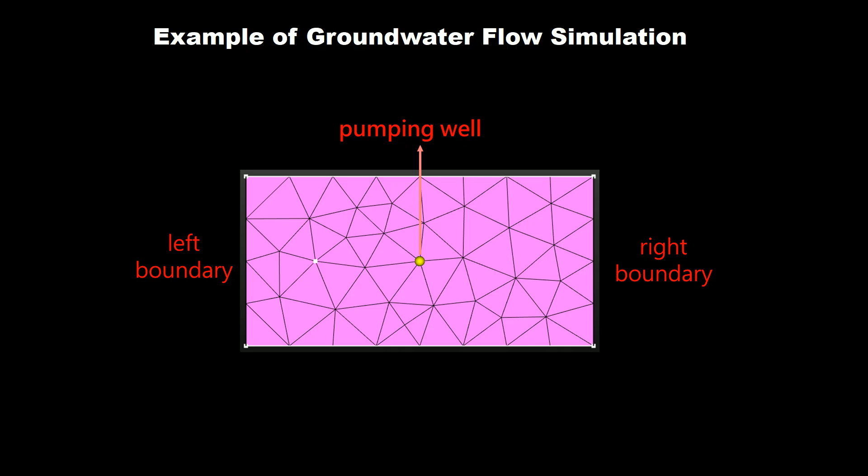This video demonstrates the simulation of three-dimensional water flow, featuring 2 measured water levels and 1 pumping well. Groundwater is continuously extracted at a constant rate from the center of the region. The simulation aims to assess how the groundwater level changes over time.

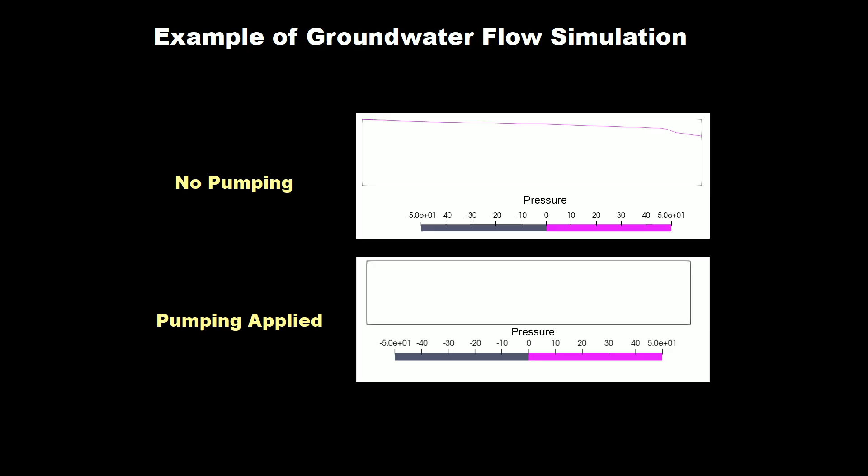The results will illustrate how the water flow, including its velocity and direction, changes throughout the simulation period. The simulation consists of 6 main steps. First, in a new project, we use the Geometry Mesh GUI to build the geometric model and generate the mesh, as well as to define the spatial locations of initial and boundary conditions.

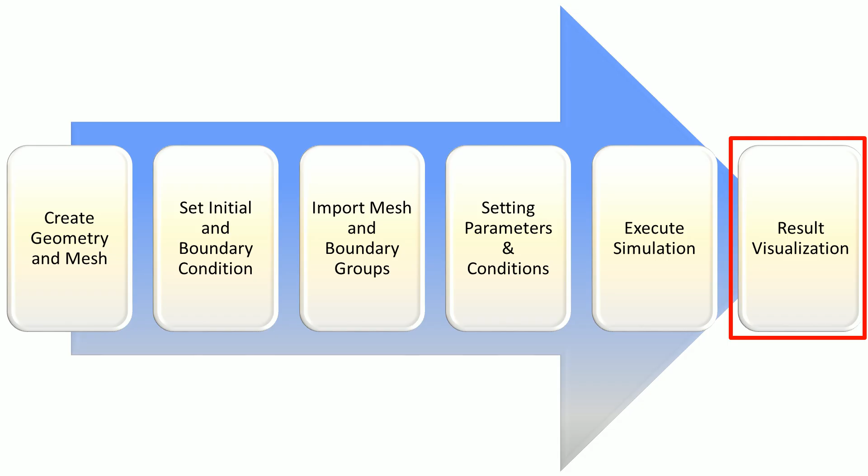Next, in the Model Parameter Input and Simulation GUI, we import the mesh and spatial group information, configure the initial or boundary conditions with specific parameter values, and then run the simulation process. Finally, the simulation result file needs to be decoded and converted to the desired format, and it can then be visualized using the Visualization GUI.

We need a central project in the THMC platform to cascade and manage all related data. To begin, create a new project by entering a desired project name and selecting THMC 3D, then click Confirm. Next, open Geometry Mesh GUI. Click File and create a new solution. A single project supports multiple solutions. However, in this case, we use the default solution name. Click Create New to complete the process.

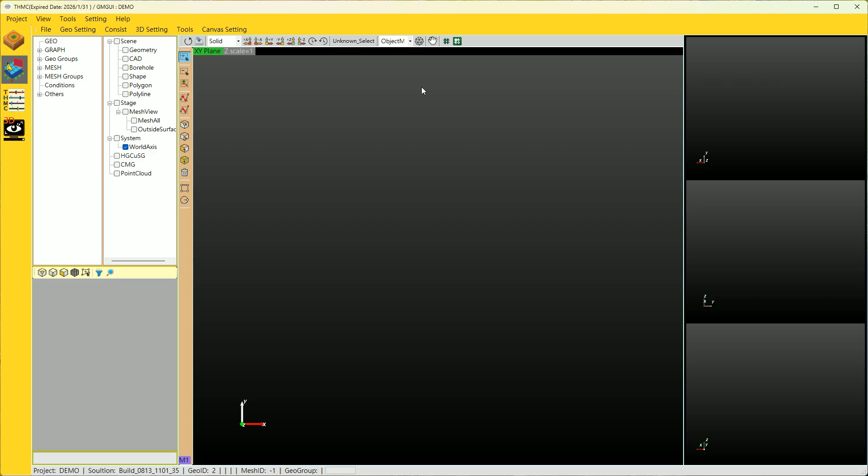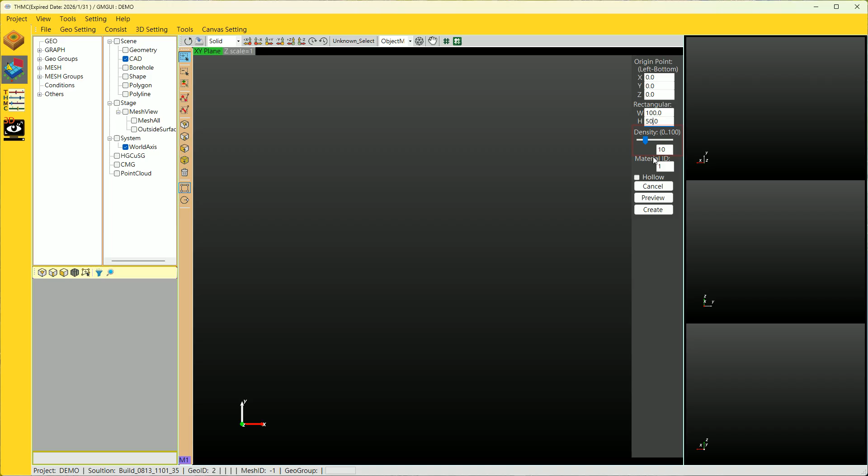To build the geometry mesh, start by creating a rectangular or a circular polygon, depending on your modeling needs. Enter the dimensions according to your site parameters. In this example, the site is 100 meters in width and 50 meters in height. At this stage, you can also adjust the mesh density. The smaller the value, the higher the mesh resolution. Once the parameters are set, click Preview then Create. If you're modeling a tunnel or hollow structure, create an additional polygon and check the hollow option.

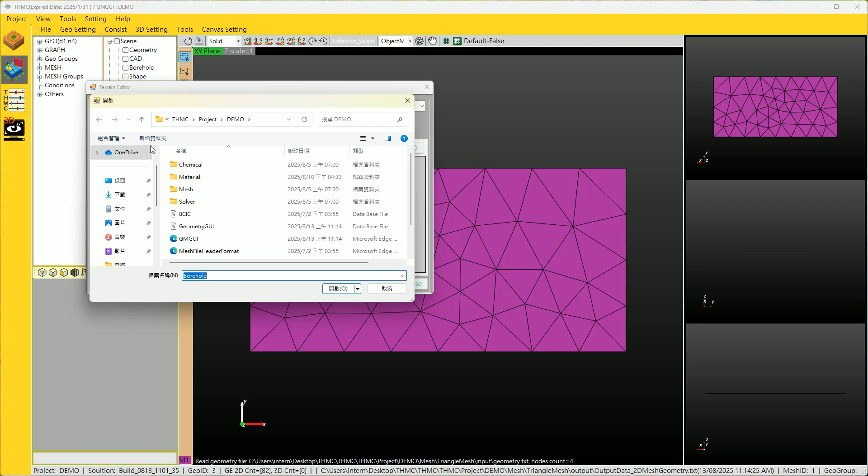Next, click the Mesh Generator icon. In this step, we create a two-dimensional mesh. The mesh type is set to triangle. The next step is processing the borehole data. Click 3D Setting, then open Terrain Editor. Click Import Borehole and select the file that contains coordinate data. You can adjust the borehole marker size under Canvas Settings to improve visibility.

To update the mesh, click the Mesh Generator icon and click Triangle again. This action will regenerate the corresponding mesh nodes to align with the borehole locations. The next step is to define the depth of the geological layers. Click 3D Setting to open Depth Editor, and you can see 3 panels in the window. Start with the first panel, insert your number of geometry layers, and the number of materials. Set the stretch according to your site.

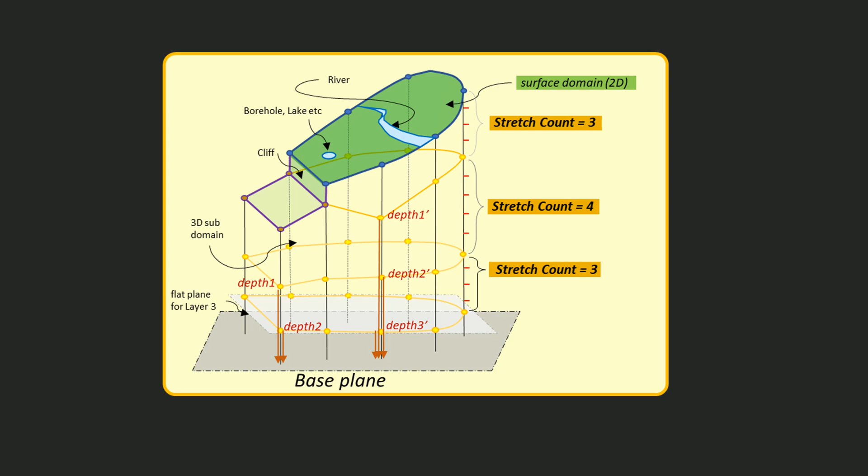The stretch count refers to the number of horizontal slices at this geometry layer, which helps generate mesh elements with finer resolution in the vertical direction. In this case, we set the stretch count as 3, 4, and 3. This means the top geometry layer is divided into 3 mesh layers, the middle geometry layer into 4 mesh layers, and the bottom geometry layer into 3 mesh layers. Moving on to the second panel, set the geometry layer for each overland surface domain.

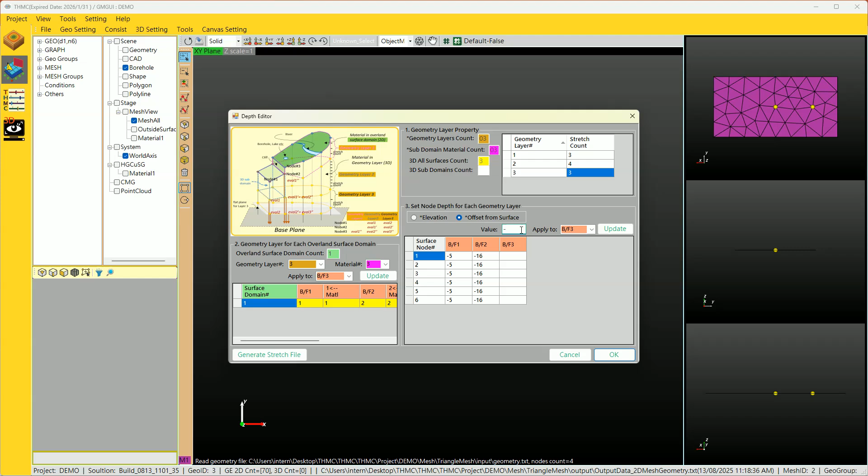Now we set the node depth in the third panel. You can select elevation or offset from surface, depending on your data. Then, input the depth values for each node across the different geometry layers. To quickly apply a value to the entire column, select the target layer, enter the desired depth, and click Update. You can also edit individual nodes to match specific terrain features.

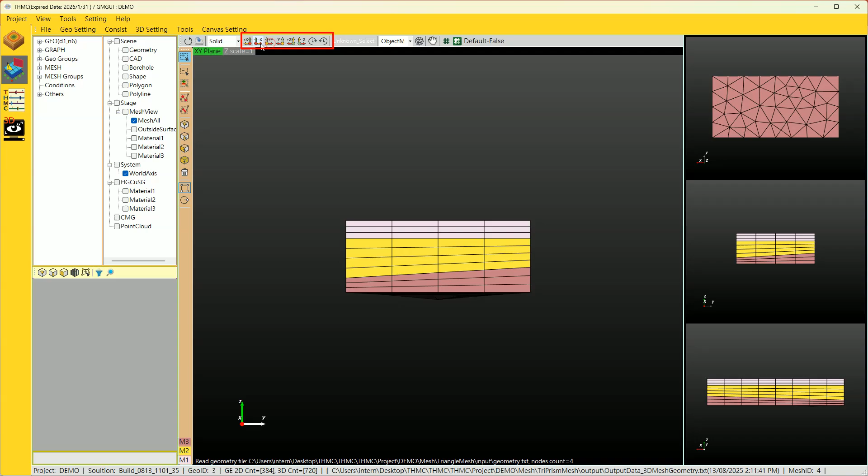Click the Mesh Generator icon, then select Triangle Prism to generate a three-dimensional mesh. Left-click to rotate the view, right-click to zoom in and out, and click the scroll wheel to pan. You can set the view direction from the panel above. Now the mesh is complete. The next step is to set spatial location groups for initial and boundary conditions. First, set boundary nodes into groups.

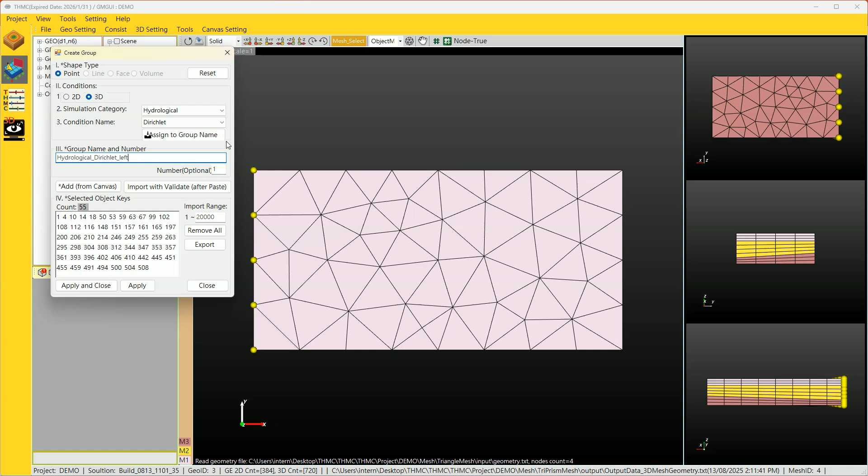Click Select Nodes and select the left boundary. You can see the number of nodes on the left. There are 55 nodes for the left boundary in this demonstration. Click Create Group. Select Hydrological as the simulation category and choose Dirichlet as the condition type for the constant head boundary. Click Assign Group Name and edit the group name to something recognizable. Make sure the point count is correct and click Apply and Close. The group can now be found under Conditions. Click the Delete All Selected icon and repeat the steps for the right boundary.

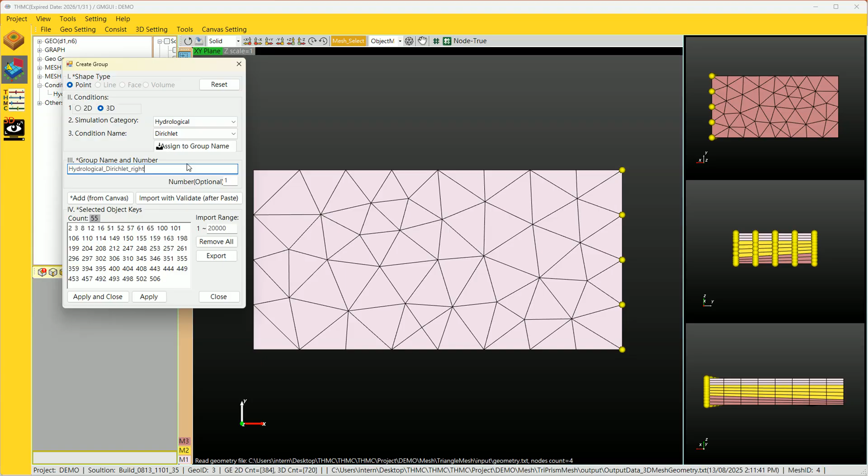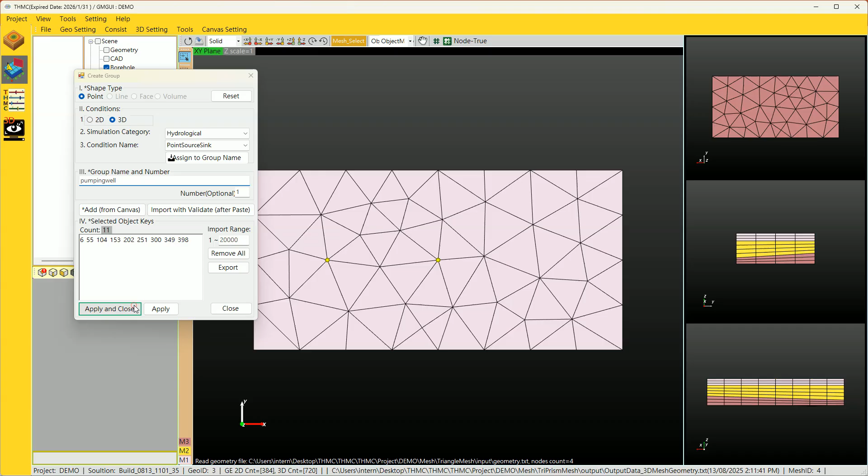Next, select the pumping well. Please note that the condition name is point source sink. Lastly, select all nodes. This is for setting the initial water level. The condition name should be initial.

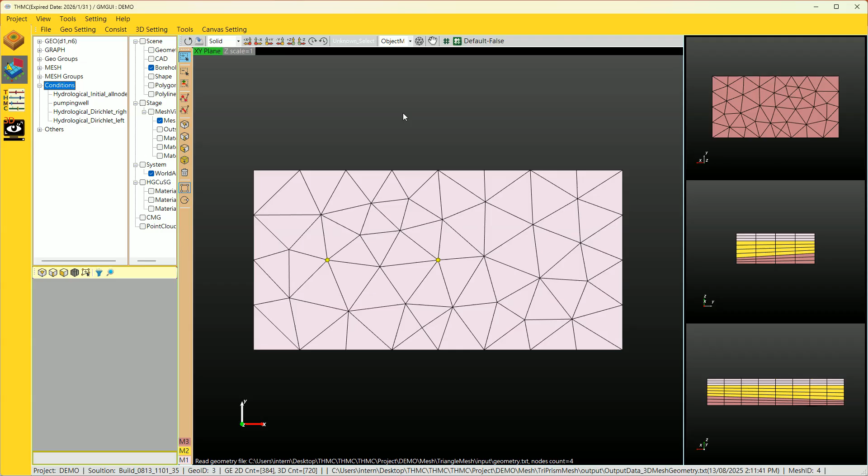You can recheck the spatial group setting results. There should be 4 groups under conditions after all the steps are done. Finally, save all setting results in the menu by clicking File, then Save Solution, and click OK. The process in this module is complete. Open Model Parameter Input and Simulation GUI. On the top left, click the Mesh Import and Boundary Data icon and click Import.

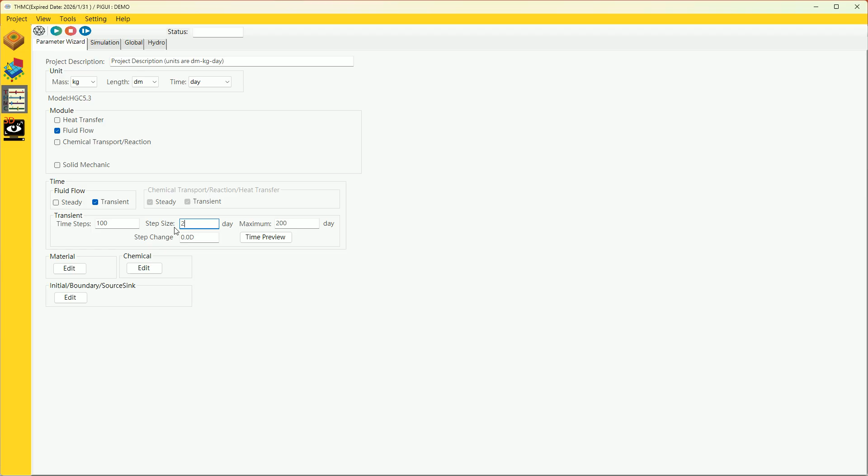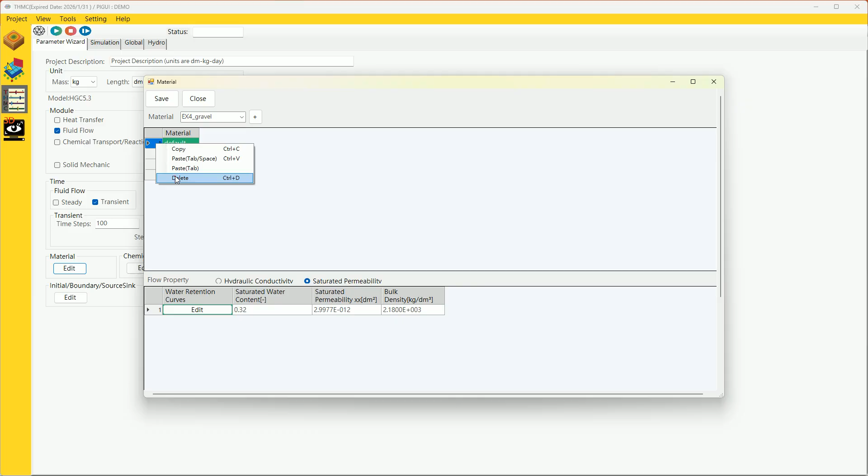In the Module section, select only Fluid Flow. Then, choose Transient and make sure the Steady option is unchecked if it's selected. Set up the time according to your needs. Next, we set the material. Select the material for each layer ID. Recall that the material count was set to 3 earlier. You can drag the materials to edit the sequence and edit the characteristics of each material below. Click Save.

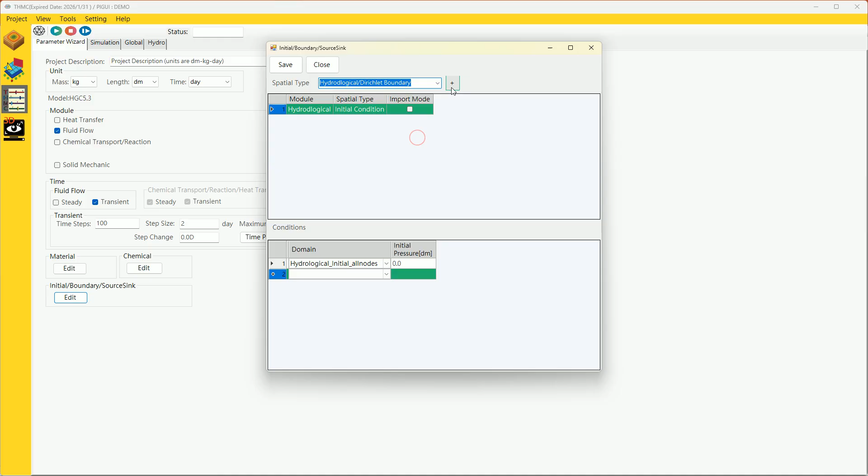Next, set up the initial and boundary conditions. Choose Hydrological/Initial Condition under the spatial type and click Add. Select the domain, which includes all nodes. The initial water pressure in this case is set to 0. Following, choose Dirichlet boundary under the spatial type. Start by configuring the left boundary, edit the profile by adding a new profile name and setting the time range from 0, which marks the start of the simulation, to 1.0e+38, which represents an effectively infinite duration. Click Save.

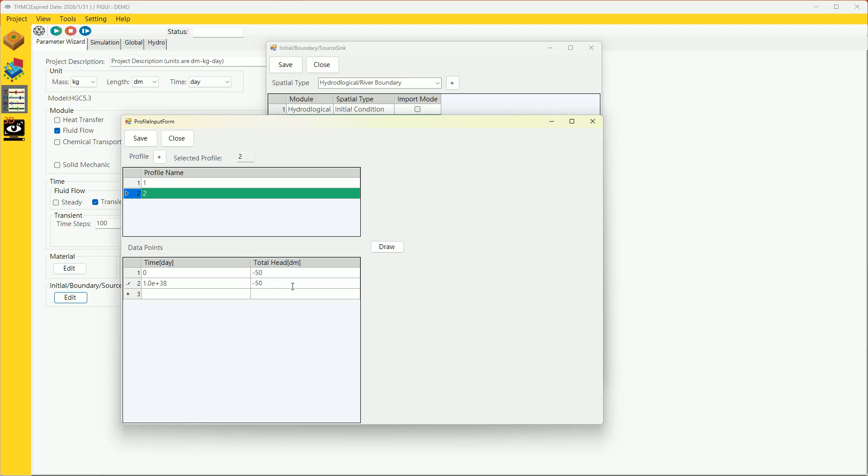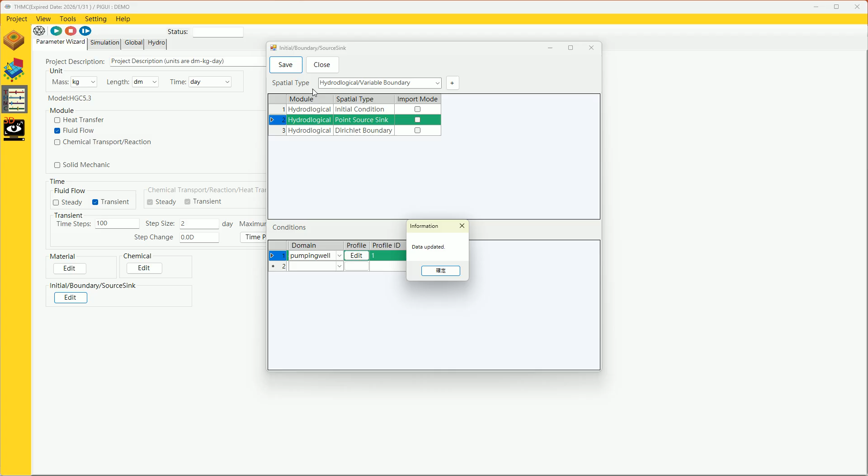Next is the right boundary. Add a new profile, edit the head, and save. Lastly, set up point source sink, which is the pumping well. Add a new profile and enter the pumping rate. Save the progress. You can now execute the simulation by clicking Start at the top. When the process is complete, the status will show complete.

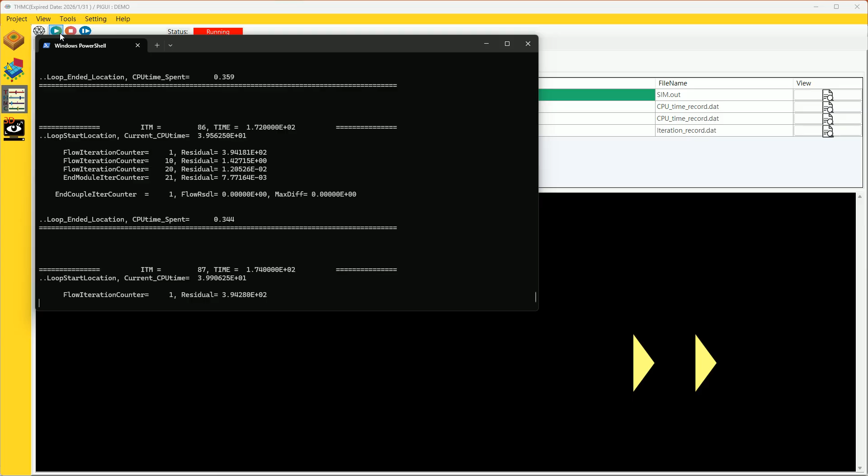Open the Visualization GUI and click the Add icon to decode the simulation result for visualization. Make sure all checkboxes below are selected. Then, choose the file you want to convert. Click the Start icon. After selecting ParaView, click Open. The software ParaView will open automatically.

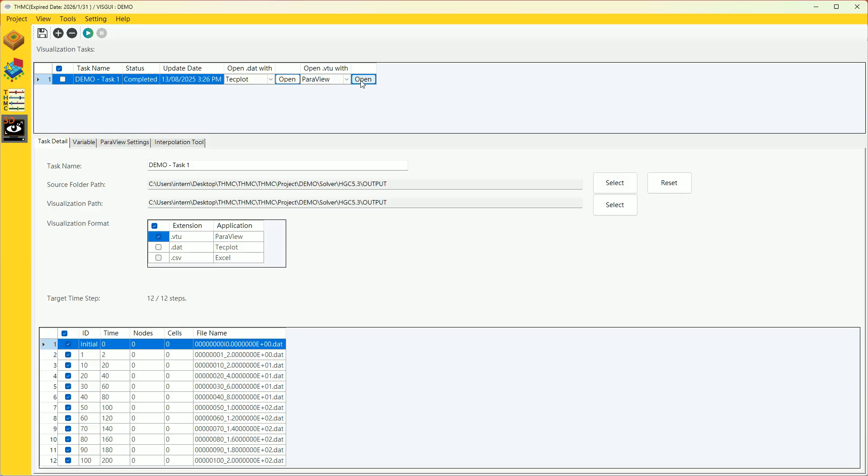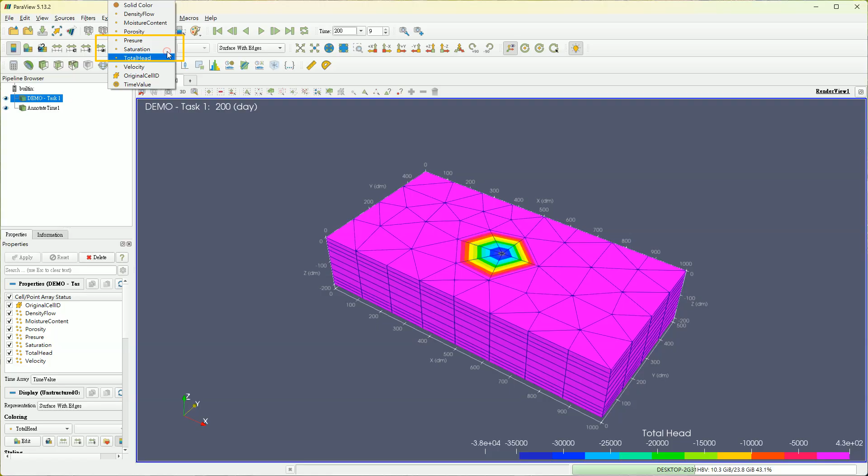In the top panel, a drop-down menu allows you to select from various physical parameters. Click Play to observe the changes over time. This is the total head demonstration. Let's watch it again. This is the velocity demonstration. Let's watch it again. This concludes the demonstration. Thank you for your attention.